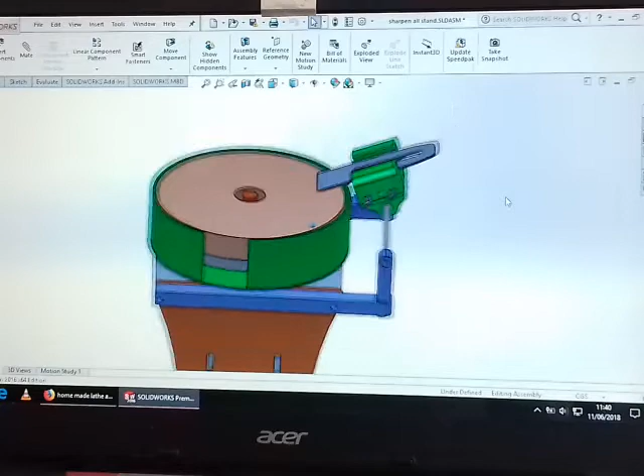Hi folks, in this video I'd like to show you the machine I've just designed in Solidworks 3D. What it consists of, I think you can see it quite clearly there. It consists of a plane and chisel sharpening machine, which is foot powered, treadle powered.

The entire thing's made out of laser cut flat plate, and no welding is required in the whole setup.

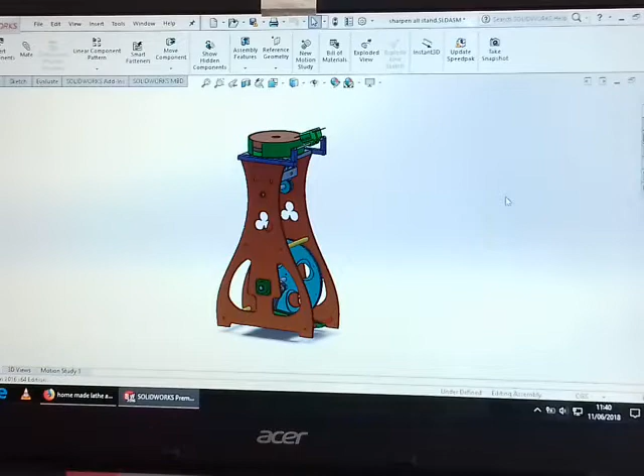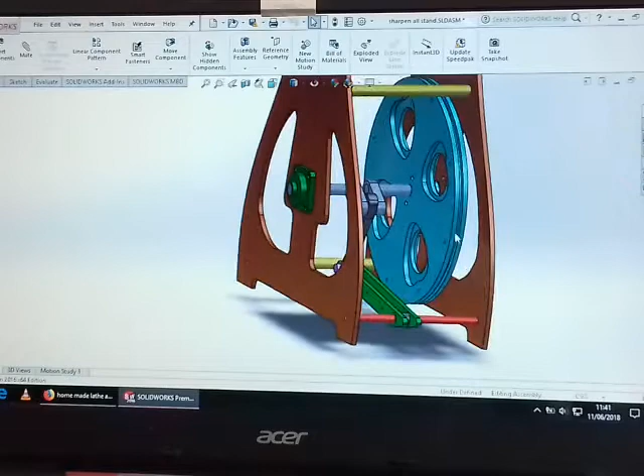So basically we'll start with the two sides. I've got my logo, the shamrock, in the middle there. They're 10mm thick plate, identical on both sides. Now they're held together with a series of solid steel round bars, one there, two in the midriff, and then the top itself is held together by that solid aluminium plate, and the whole thing is held together with 10mm, 1.25 metric Allen bolts basically.

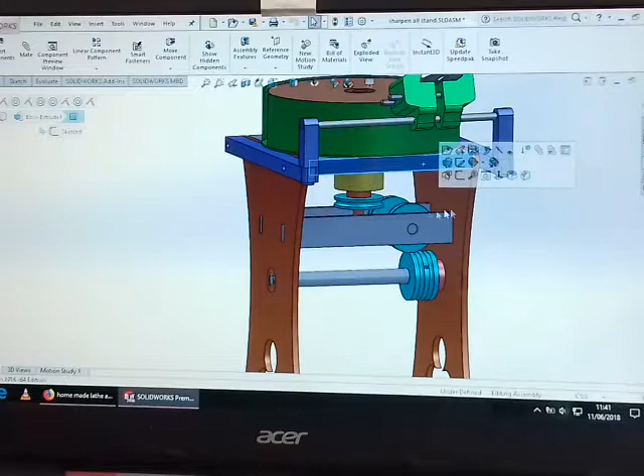It works on a pulley system, a pulley crankshaft system, which is all laser cut and tack welded, MIG welded. You see the crankshaft there going round, and that works off a foot treadle at the bottom here.

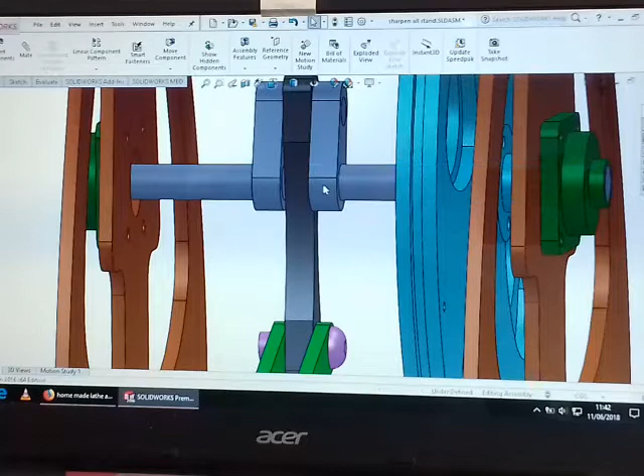These two bars, and on top of there would be a plate of wood to rest your foot on top of. Again, that's all pinned, no welding needed. In fact the only welding needed, if you wanted to do it that way, you could weld this crank web to the main shaft itself, but I'm going to opt for roll pins, which go right through there and right through there on the little end as well.

And then the main conrod is made of, you can either get it made of aluminium, or in this case I'm going to make mine out of wood with two brass bushes in the actual wood itself. You can look around the back there, you can see the actual conrod and the crank itself there. So that piece there, that would be made out of wood.

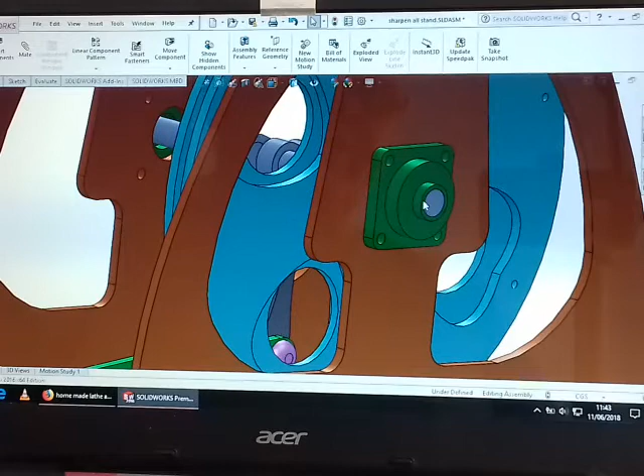The bearings for the bottom are just the standard, people call them pillow block bearings or agricultural bearings, with a self-centering shaft in the middle, 1 inch or 25mm shaft in the centre, and they're just held together again with 10mm Allen bolts.

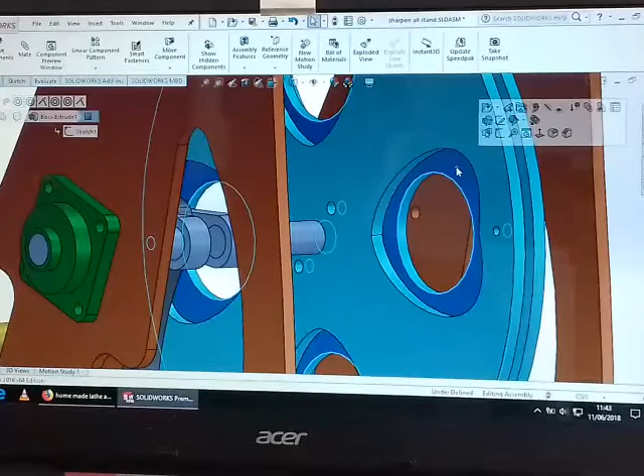The flywheel itself consists of, again, two pieces of 10mm plate. In fact, sorry, 3 pieces. You've got a central piece there in the middle, and then one on either side, and they're bolted together, bolted and threaded together to give it the reciprocating weight. You could just have a plain solid wheel if you wanted to. I've just drawn some hearts and circles in the middle there just for some aesthetics.

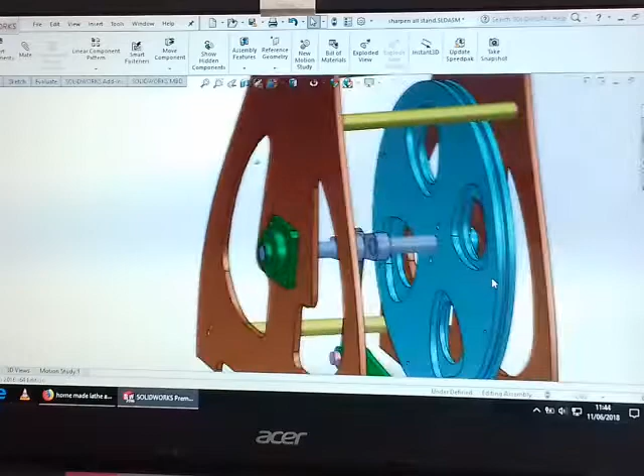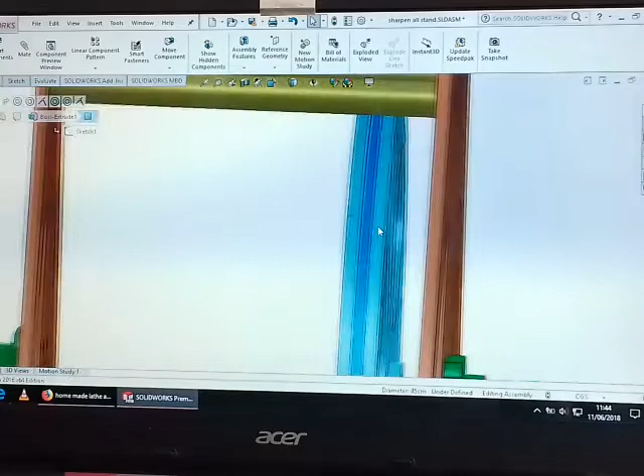These two are 3/4 solid steel bars, again threaded and bolted onto the end plates, and then the pulley system runs in the centre of the wheel itself, which is just a square section, and that's 10mm deep, that is the middle section there, and you've got 2 plates that come from either side.

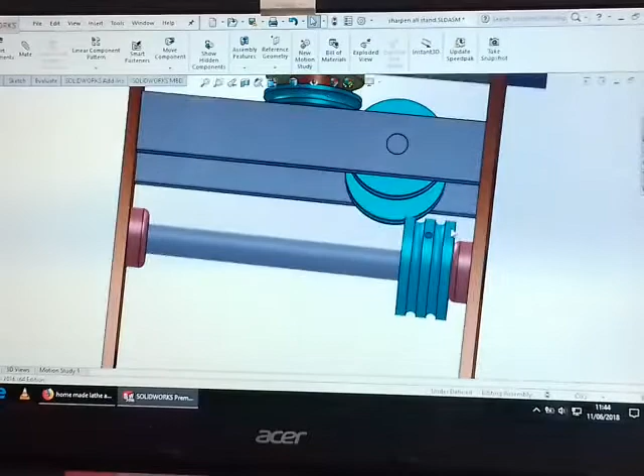So like a leather belt fits in, off what you would see on the Singer sewing machines, on the industrial Singer sewing machines, and it goes round up through this pulley here, and then the second belt goes on this side and goes round the intermediate pulley and then round the main pulley itself and back down again. So you've got a leather belt drive system.

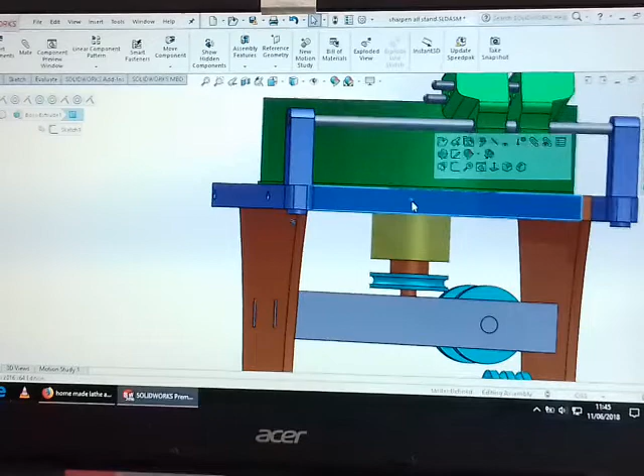In the centre of this solid plate, you've got just 2 standard bearings, 6303s I think they are, onto a 17mm shaft, which this main pulley, the main drive pulley, fits onto as well, and which is pinned, and that rises up through the centre.

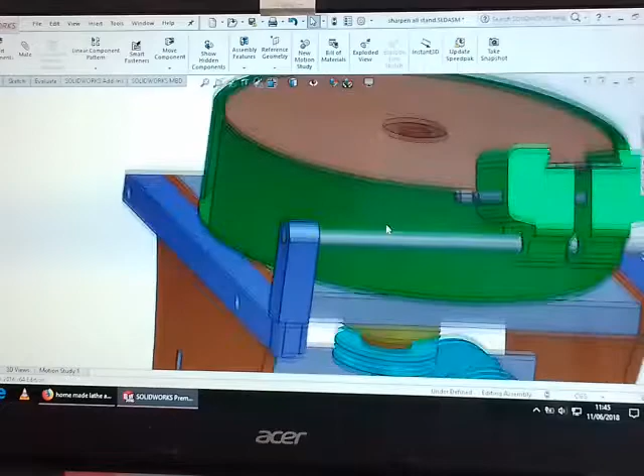So if I do a sectional view through there, you can see the component parts inside. It gives you a basic view there of the main plate.

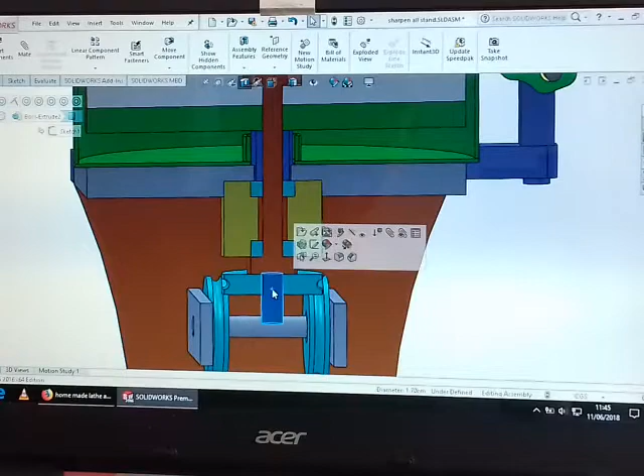Another block, which holds this block here, holds two 6303 bearings, which holds the main shaft through the centre, which goes up through the top, and then the main stone itself fastens onto another plate which is there, which this piece is actually the sharpening stone, and that just sits snugly onto the top of another drive plate there, which is pinned to this main shaft.

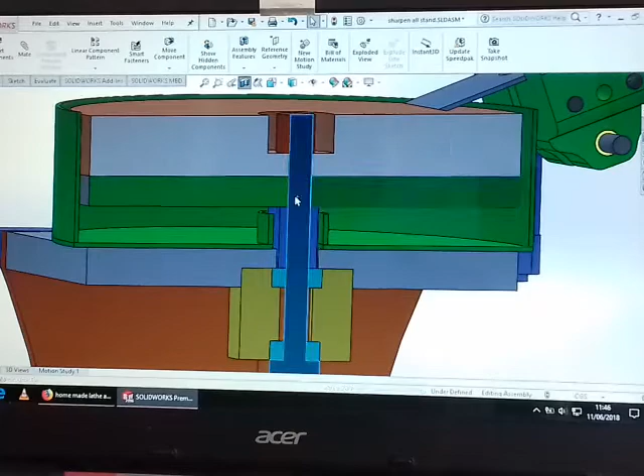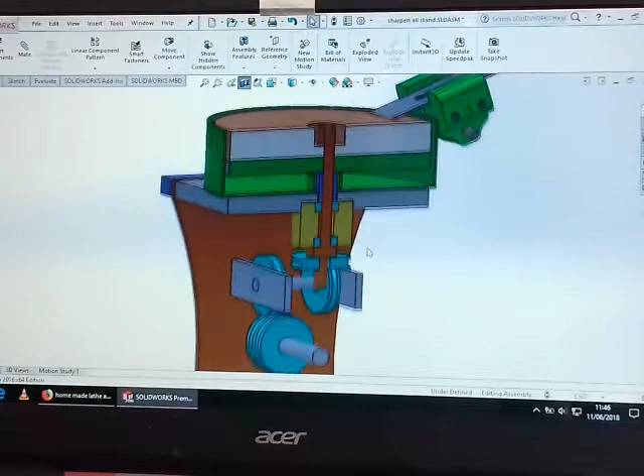So it's fairly simple construction, and the green vessel there is to trap the water and drain the water back down into a drain if you wanted to, and a drip feed from a water drip feed tank from the top. So it looks complicated, but it's not.

These pulleys, all these pulleys here, can either be made out of metal or nylon, and I'm going to use nylon because I can turn it by hand on the woodwork lathe. I don't need a metalwork lathe for it.

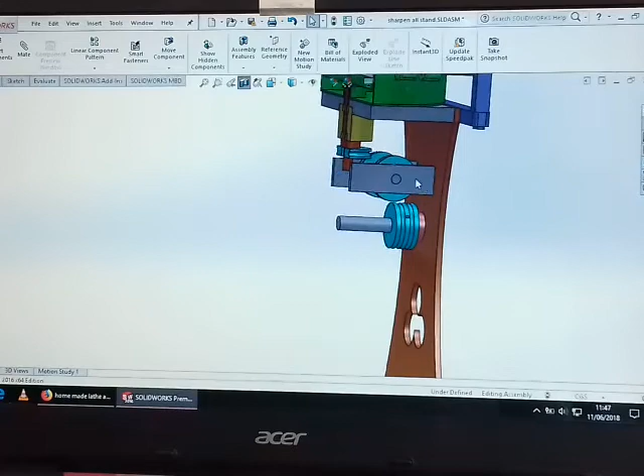And then the whole construction itself, at the top here for these retaining plates, as you can see there, they're actually notched into the main side plates. So everything's self-jigging. You don't need to line it up. You just need to build it on a flat surface, on a flat level surface.

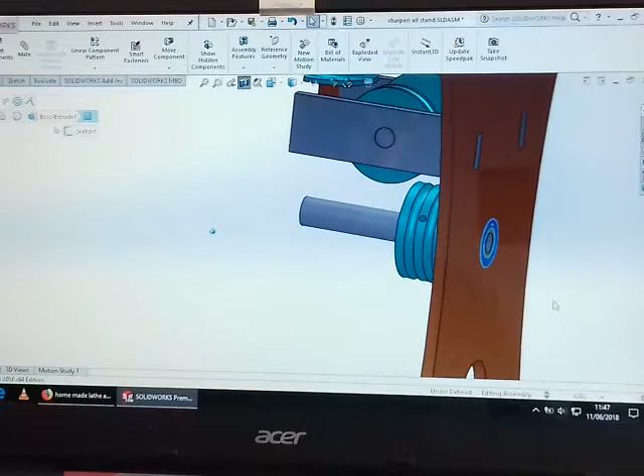And then the bearing, there's two bearings there pushed into the steel plate itself to hold that pulley shaft there. So there's not a lot of welding needed, or no welding needed if you so choose. And then the actual jig itself for holding, I'll come out of the sectional view.

The actual main platform is two 3/4 inch steel square rods, and the whole thing, the bolts go through the side into the block itself. So that's all self-jigging as well.

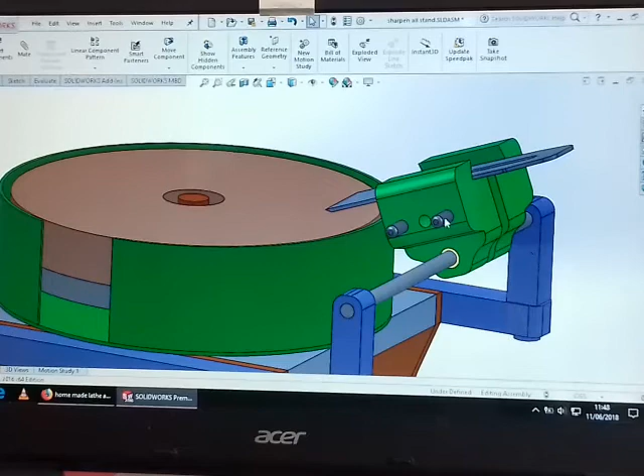The actual blade holder - you can buy these already made for sharpening planer blades, and all I did with mine was convert the bottom end. I put a bush into the bottom there, which slides along this rail, so you can sharpen your blade as it's turning. You just move this left to right by hand, and you don't have to make this if you don't want to.

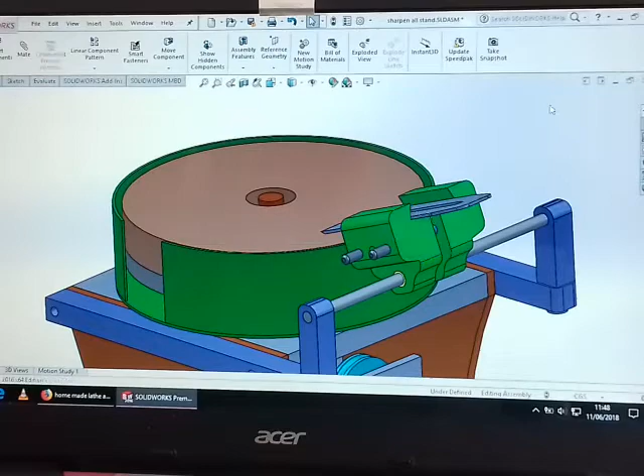That would be probably one of the most expensive bits if you're going to make it, but it's something I've fancied making for a couple of years now, and I'm slowly but surely trying to find second-hand or new metal pieces where I would need it, to get the project on the go.

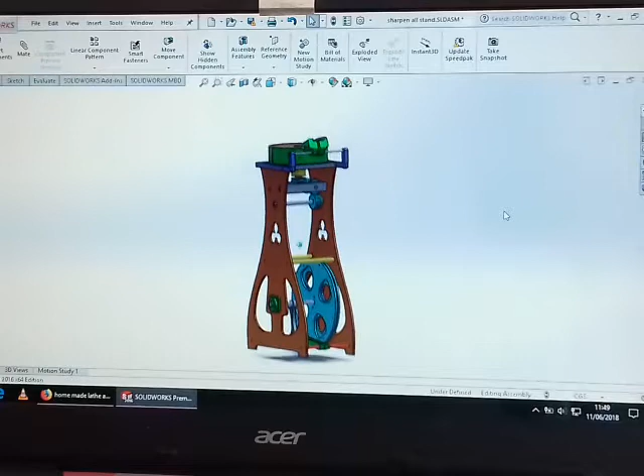Or download the files, the 3D files, for having it all laser cut. Laser cut's the way to go - it's the cheapest option, because the whole thing there could be cut out in less than an hour on a laser, probably just a few minutes actually if it's a decent laser. They cut the whole lot out, all the holes where all the bolts go, everything all done. So there's no work to do - all you have to do is basically assemble it.

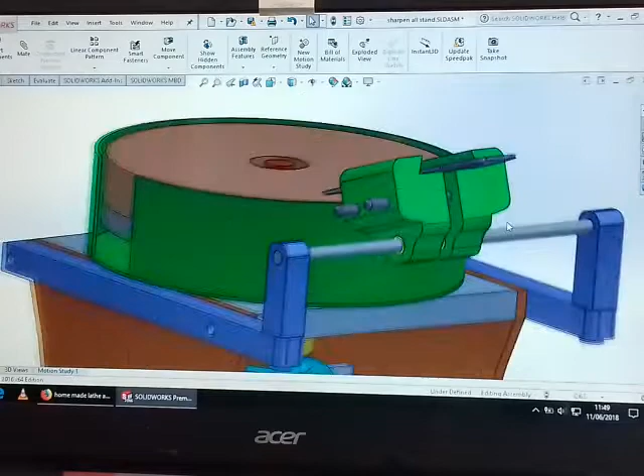So I'll give you another look at the top end there. That's the planer blade actually in the jig, which is resting against this stone. It moves backwards and forwards across the stone to evenly sharpen without wearing out the stones.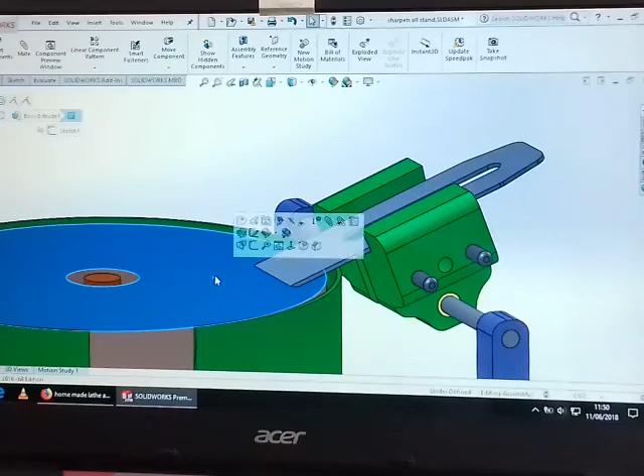Now the stone is a standard - you can get the Tormek grinders. That stone there is a stone out of a Tormek grinder, and instead of using the edge of the stone, which you would on a Tormek that way up, you use it on the flat. There's lots and lots of different stones you can actually adapt this to - you just mean altering the central hole there to act as a drive.

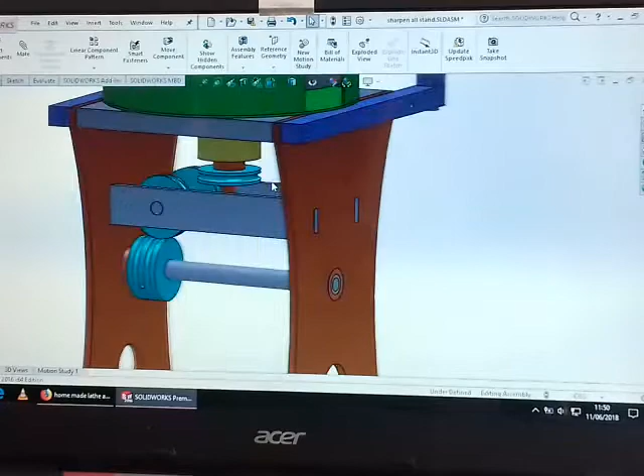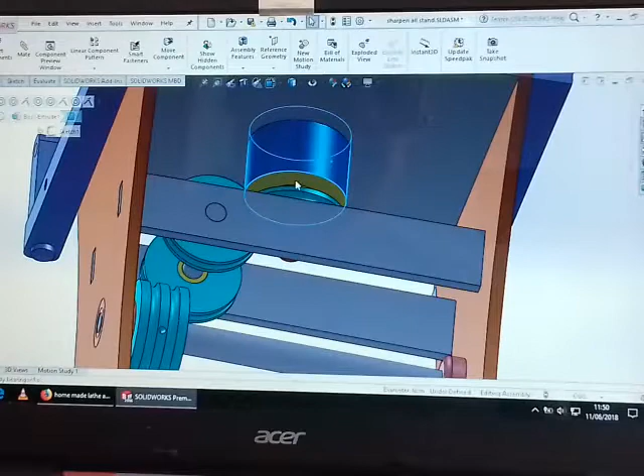So that's basically it, it's not that complicated. This bearing block that holds the bearings is going to have to be turned on a lathe, and then interference fit into this plate here, or you could actually put Allen keys through this block from underneath on that edge there and screw that to the plate if you wanted to. Lots of different ways you could do it, but there isn't another one on the market like this, which is treadle powered.

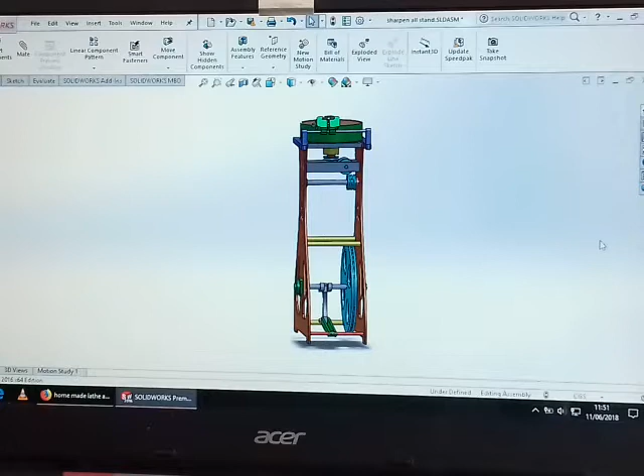The whole thing is about a metre high altogether, and a reasonably fit person could lift this into the boot of the car and take it anywhere for sharpening, because anybody knows that if your tools aren't sharp, it makes you work that much harder.

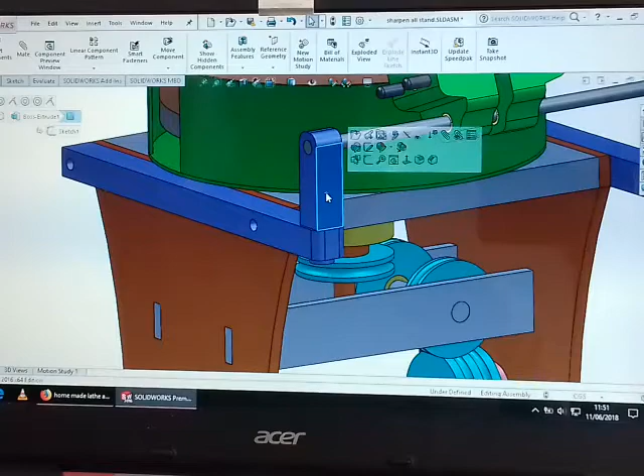This rod which the sharpening block slides along is again square material, and it's got two spigots turned at the bottom there - you can see that just literally fit in a slide fit. So as long as it's a good slide fit and keeps it firm and square, no need for screws etc. It's a foolproof design.

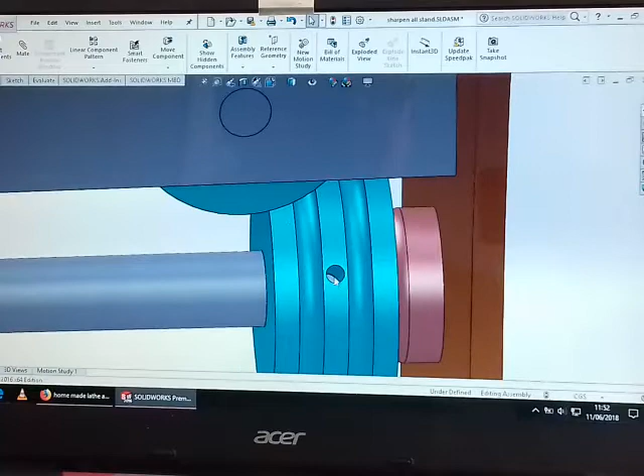It took me a while to work it all out and get these pulley systems aligned, but all those pulleys there are all exactly the same diameter - it's just where you position them on that shaft. There's a roll pin hole there for actually keeping it in situ on that shaft itself, and there's the two bearings, the two bearing housings which push in from either side and go through the actual plate itself.

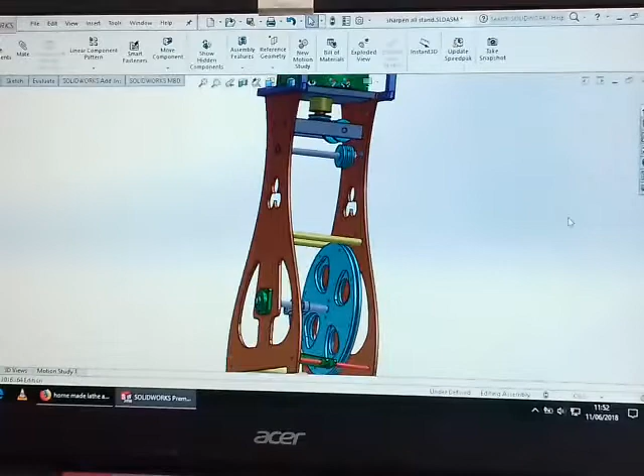So it's a simple way of doing it, and an effective machine to use without electricity. It works out at about 25:1 ratio, so the stone's not going too fast. Obviously the faster you treadle, the faster the stone will go, but you don't want the stone to go too fast - you want it to go slow, so it doesn't heat up the very edge of the planer blade itself.

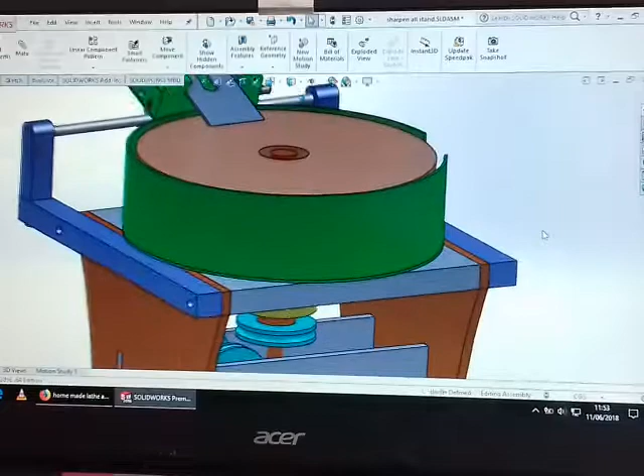So I think that's about covered everything. As you can see, everything fits together there - the main rail, the side, and the main block. You could make that block out of wood if you wanted to, but a piece of aluminium's not that expensive.

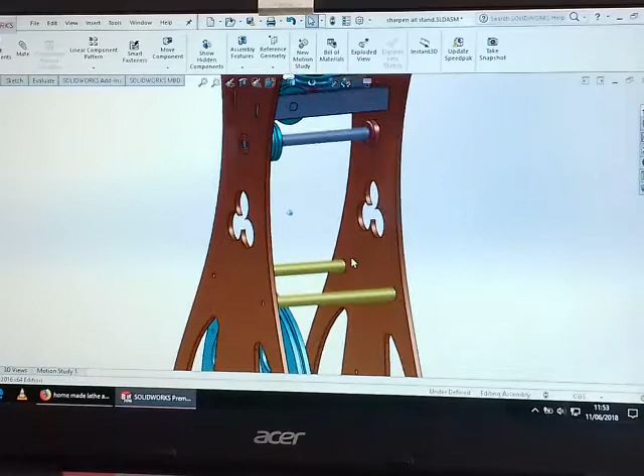It consists of 2, 4, 6, 8, 10mm Allen bolts to hold the whole thing together, and then you've got 10mm Allen bolts through the bearings there themselves as well.

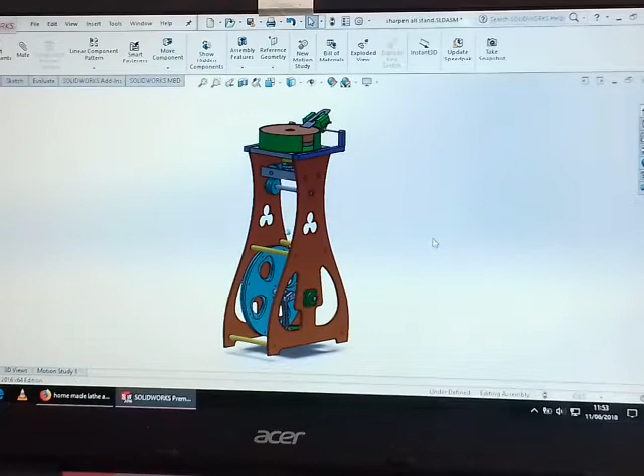When I eventually get round to doing it, I will keep everybody posted. And that's my homemade treadle powered horizontal sharpening machine.